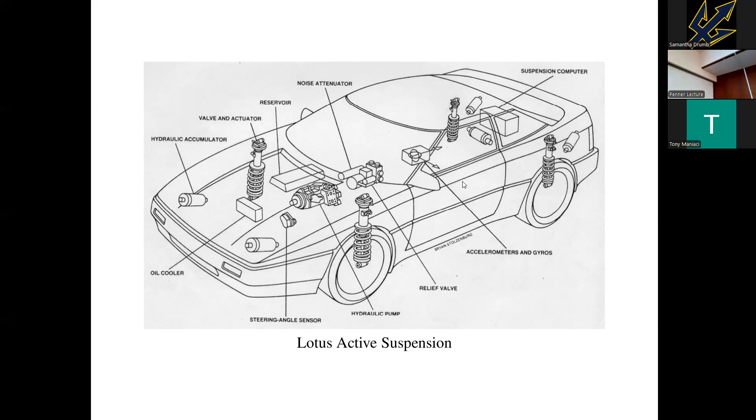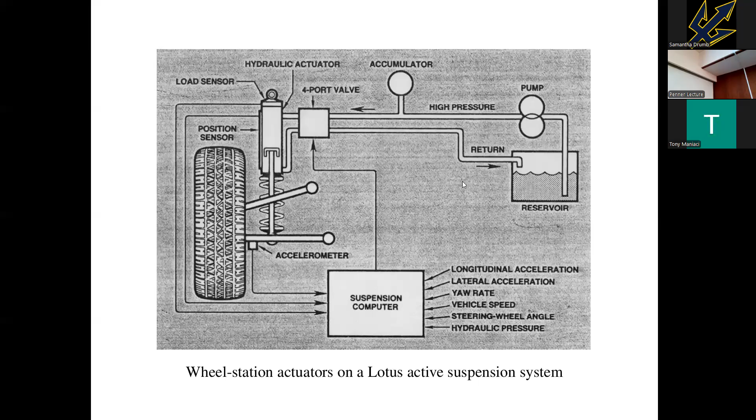We have a piston and cylinder, and high pressure hydraulic fluid can be injected above and below the piston to extend and contract it through this four-port valve. It's all controlled by the suspension computer, which takes measurements from a load cell, a position sensor, and many other sensors on the car. So this is a control system.

Fast forward five years, this is also a piece of motor racing history. It's the first time the championship was won with an actively suspended car. This is the Williams driven by Nigel Mansell. And this is the beginning of the story for me.

I arrived back in Cambridge. I'd spent three years teaching at Ohio State from 1987 to 1990, and I was appointed a lecturer in Cambridge immediately after that. The following summer, I arrived as probably the most theoretical person in the control group, with a background in robust control and so on.

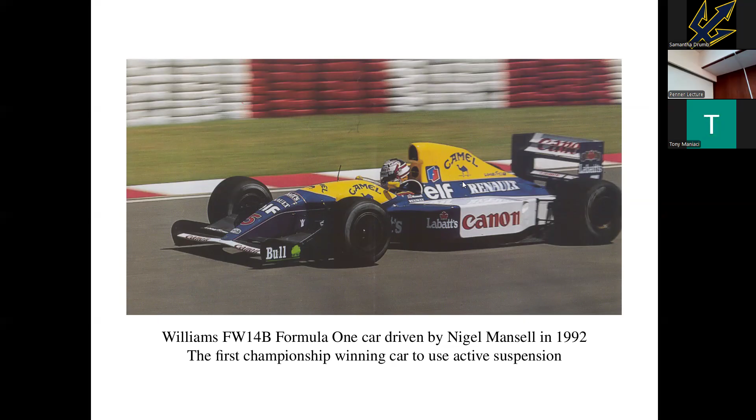Through a chance phone call in the summer of 1991 from Paddy Lowe, who later became quite famous as an engineering designer and director in F1, I got involved in consulting on this very project. It was tremendously exciting. I was brought in as a control specialist, not knowing really very much about mechanical control systems or the particular needs in Formula 1.

One of the main reasons and advantages of active suspension in F1 was due to the aerodynamics. The wings on a Formula 1 car produce downforce, so that you can go around the corner quicker by increasing the normal reaction. The downforce is about four times the weight of the car at high speed, so you could theoretically drive an F1 car on the ceiling.

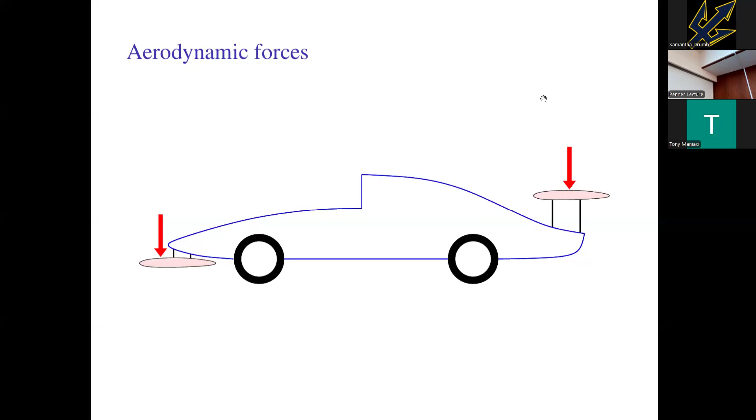Now the problem with a normal suspension system, and even the tires, is that as downforce increases, the ride height reduces. And the aerodynamicists don't like that — they want to design a lift coefficient so the car works at a particular ride height. Active suspension was very good because it could adjust for that, compensate, and be scheduled on the speed of the vehicle. So that's the first big advantage of active suspension for racing cars of this type.

There are also other important aspects: ride and handling. Ride is how well the car responds to bumps in the road, that's how I like to think about it. Handling is how well the car responds to driver inputs like braking and cornering.

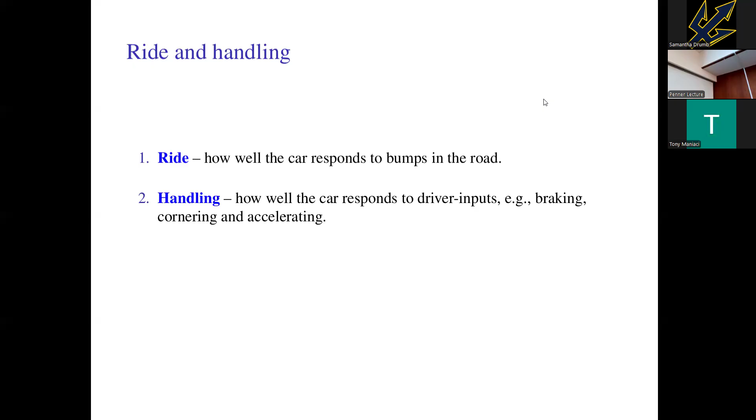And it's a compromise. Here's an illustration: we've got the Cadillac Fleetwood sedan, and this gives a wonderful ride. You're going along a bumpy road and you get a smooth ride, but coming to the stoplights or taking a corner, the body rolls around and it's uncomfortable for the passengers.

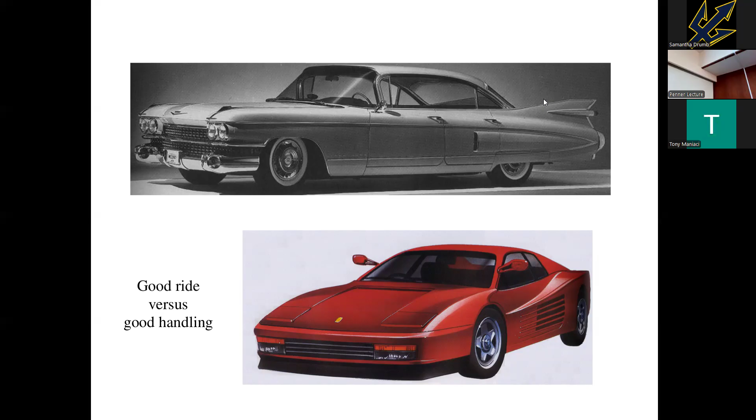The Ferrari Testarossa has great handling, so the body is well controlled under braking and cornering, but it's not very good on a rough road. So for the Ferrari you need a smooth road, and for the Cadillac you need a smooth driver.

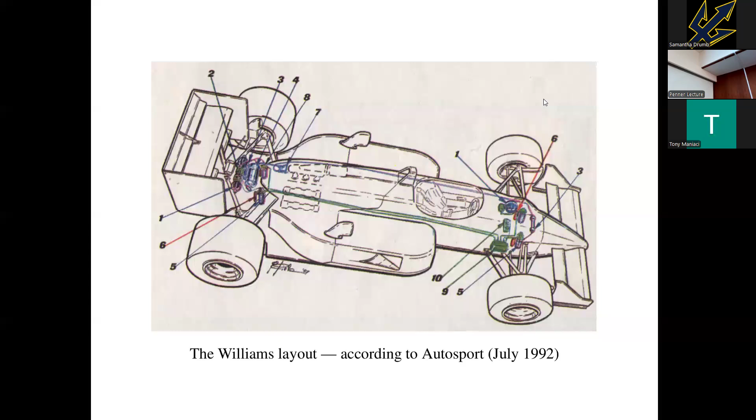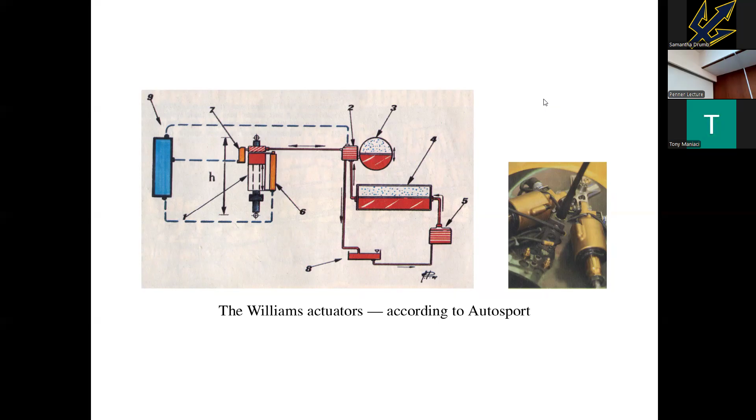The Williams hardware layout was quite different from the Lotus — you can see hydraulic links from front to rear of the car, for example, and the wheel station actuators were single acting rather than double acting. There are a number of significant differences in how they operated. So this started to interest me.

Active suspension is a great multivariable feedback control design problem. One brings the techniques one knows, but there are all sorts of extra things to learn and puzzling things for the theories: different hardware layouts, hydraulics, passive elements, sometimes different actuators and sensors. How do you come to terms with this? We know how to derive control as control theorists once someone gives us the plant, but the plant itself — there are all kinds of possibilities there to think about.

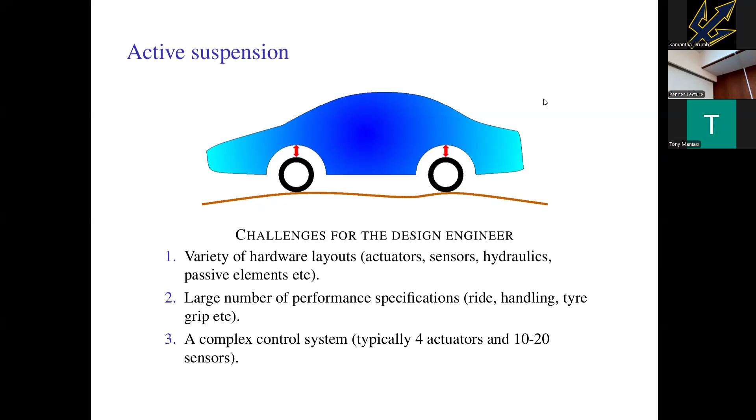And then there are all these different performance specifications — ride, handling, tire grip, and so on. It's not a trivial control system, with actuators and between 10 and 20 sensors.

So the consulting and applied work was very exciting, but I started to think theoretically, trying to understand the fundamental trade-offs going on here. This is commonly done in the area: boil things down to the simplest possible model, called the quarter-car vehicle model. It's two masses and a force, an equal and opposite force that can be applied between the masses.

If it was a conventional passive suspension, that would be a spring and damper. If it's an active suspension, you're providing the force somehow. So this is a useful abstraction.

We've got road disturbances - those are the obvious ones. And I found it useful to think about load disturbance as well, because in the F1 case, you've got downforce from the aerodynamics, so it's another pathway. At least at a certain level of simplification, you can think of load disturbances as a surrogate for the handling input - it's a different transmission path.

For example, when you brake, you get induced loads on the sprung mass. There's also induced loads on the unsprung mass, but as an approximation, in a simple model, Fs is a surrogate for handling.

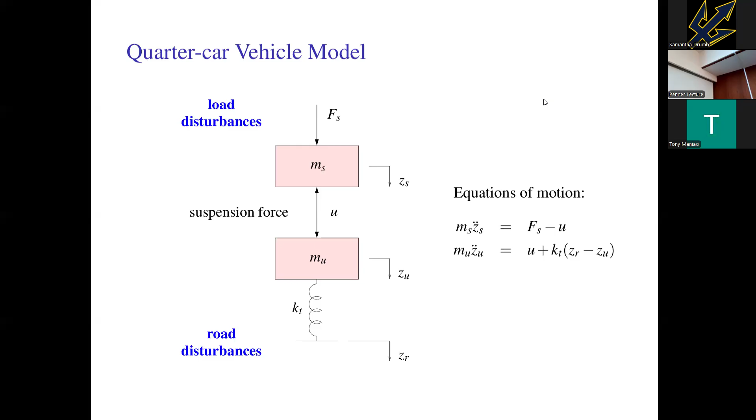The equations are two lots of Newton's second law, and what I'd highlight here: notice that the suspension force is minus u in the first equation and plus u in the second. It was Karl Hedrick, the late Karl Hedrick from Berkeley, who made a very interesting observation.

I bumped into this when I started working on this problem. If you take the sum of those two equations, u cancels out. So the control force doesn't have any effect on this particular equation, which you call the invariant equation.

And there are certain consequences. So if you look at road disturbances, for example, you can look at a transmission path to various things: sprung mass, or sprung mass acceleration. Ride comfort is what that transmission path is used to evaluate.

Tire deflection is sometimes thought of as a handling input, but it's also called mechanical grip - how well the car is staying in contact with the road. To prevent too large a deflection there when you're going over a bumpy road surface is important.

Suspension deflection, if you've got limited travel, you've got to worry about that. The important thing here is that these three transmission paths turn out to be dependent on each other. In other words, if you design one, the other two can be calculated from the invariant equation. So already that's an important insight for the designer, no matter what you do. If you design one pathway, the others are fixed.

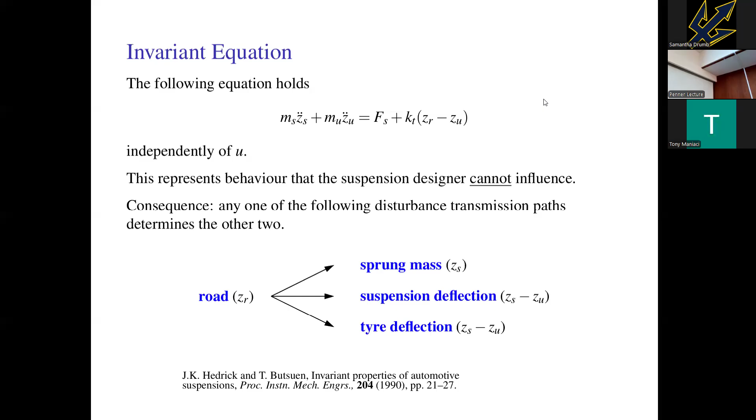So I started to work on this, looking at questions, as one does as a theorist. You take a problem like this and you try to develop insights. What is the complete freedom on a given transfer function? The methods of robust control that we were familiar with at the time allowed you to get nice, necessary and sufficient conditions on what was possible and what was not. And this is hardware independent.

So again, I found that very useful - that you could have a benchmark before you decide on the layouts of actuators and sensors and whether there are passive elements. You would know what was possible. And so you could even ask, what is the minimum number of sensors to achieve a certain effect?

Are there conservation laws? I'll show you one. And can the disturbance paths for ride and handling be adjusted independently? The invariant equation doesn't prevent ride and handling being independently adjusted, of course, and that's one of the big attractions of active suspension.

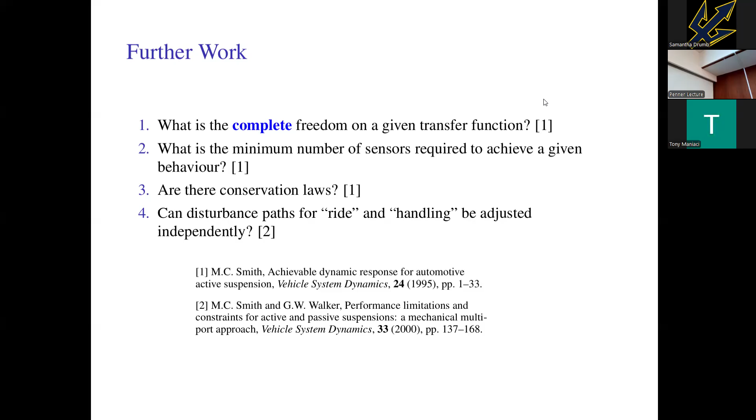You try to have a car that's like the Ferrari for handling, and like the Cadillac for ride. And that's the aim of such systems.

I'll just show you one conservation law, which is very familiar for people who've taken advanced classical control courses. So what we're looking at here is the grip transfer function - the transfer function from undulations of the road surface to deflections of the tire. What it's saying is the 0 dB line, that's modulus 1, no amplification.

The green is when the deflection of the tire is less than the excitation of the road at a particular frequency, and the red is where things are worse. The result - the area formula - says that those two areas are equal. So no matter how clever you are, active suspension, whatever, there are going to be frequency ranges where the mechanical grip is worse, where there's actually amplification. So you need to bear that in mind in the design.

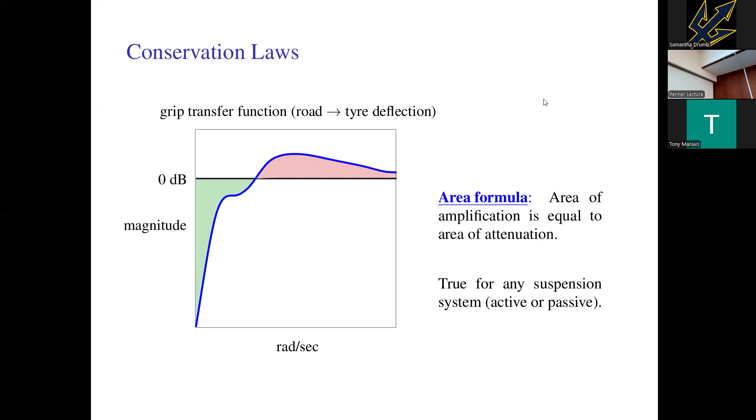Moving on just two years, Williams won the championship in '92 with Nigel Mansell, and with Prost in 1993.

Active suspension was banned for the '94 season. Why was that? Technologies come and go all the time in Formula One, and sometimes there's no logical reason why things are banned. Active suspension was not on the radar at all for being banned when people were not getting it to work. It's only when one team gets ahead and the races become boring because the same team's winning all the time, that the focus comes on the technology. And so it was banned in the '94 season.

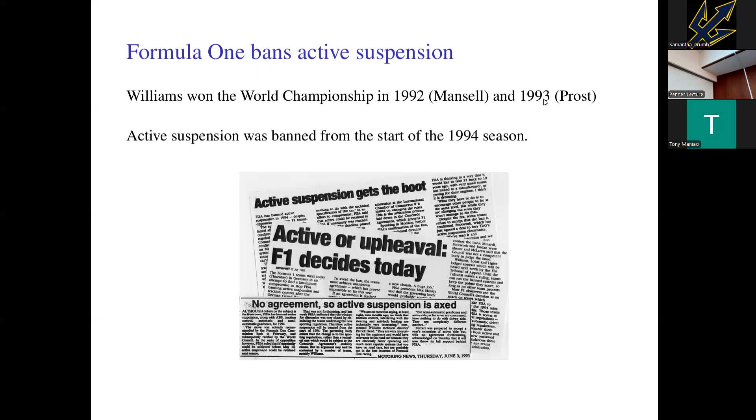There is something very sad that happened in the '94 season in the Williams car. Ayrton Senna was tragically killed at Imola. I give this quote here - I think it's the only time when active suspension was mentioned in a Times leader column.

Initially the cause of the crash was debated and was not properly known. People pointed the finger at the ban of active suspension and said, well, the cars are now more difficult to drive because the aerodynamics has been tuned. It's so sensitive. Now with a passive ride, they're much more twitchy. Is that the reason? It turned out not to be the reason, but it was a fracture in the steering column that was the cause.

But I just mentioned that, and I think now I'd like to move from that very sad event to come back to how I responded to this as a theorist. It's very wonderful to be working on these systems and doing theory at the same time, and suddenly we weren't allowed to race them anymore.

So let's go back to the quarter car and compare. On the left, that's a conventional spring and damper suspension. On the right, we have an actuator and a controller, and we're making measurements on the system. The work I'd started to do in active suspension was very much focused on what are the limits, what's achievable, what's the maximum you can achieve with an ideal actuation system and a sensible set of sensors.

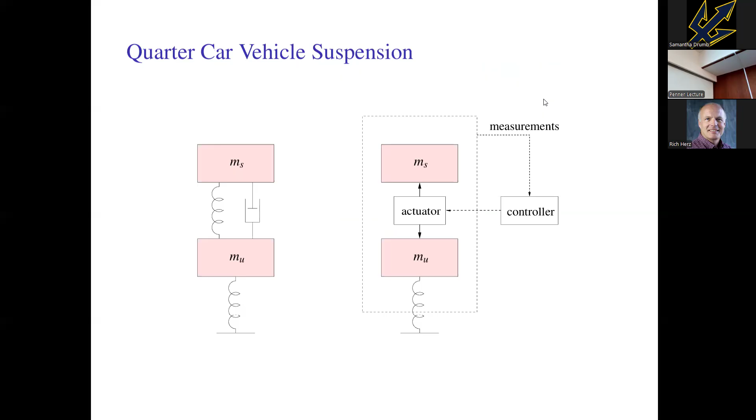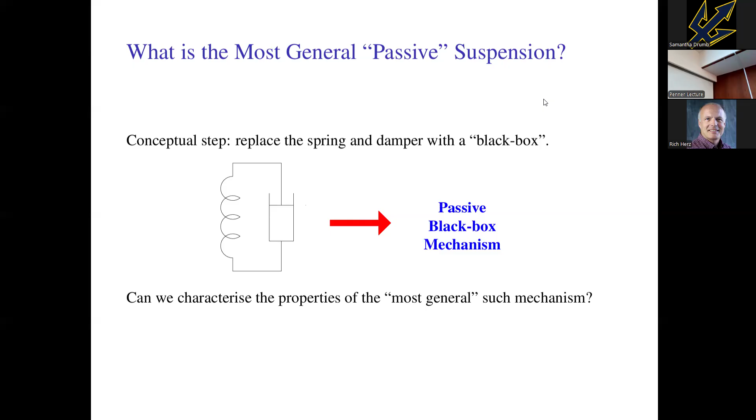Okay, so I thought this would be a quick and easy theory paper. I knew some theory from my PhD time about passive impedances, electrical impedances. And so I thought that, well, conceptually, you can replace the spring and damper by a general passive black box mechanism. And if you don't have a power source, it is not active - that would be the most you can do. And then the natural thing is to try to optimize over that class. So can we characterize the properties of such a mechanism?

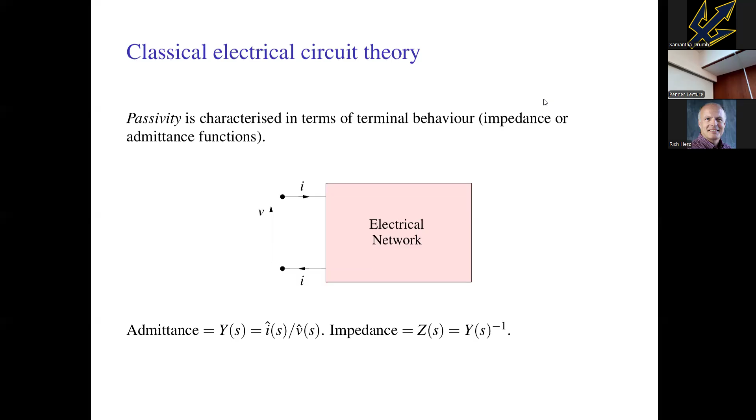Okay, so let's think about the electrical case. So we're thinking in black box terms, an electrical network, two wires coming out, a current I being drawn, and a voltage across the terminals. The admittance is current over voltage at the driving point, the Laplace transforms of those, and the impedance is the inverse of that.

Now, what was shown back in the 1930s is that a necessary condition for an impedance to be passive is that it must be positive real. So if you draw the frequency response of such a linear time invariant impedance function, it must always lie in the right half plane, can't enter that red forbidden region. And that it's necessary is not too difficult to prove, because the power drawn is the product of current and voltage.

What we're saying here is the phase shift is between minus 90 degrees and plus 90 degrees. So if you take current times voltage, by Parseval's theorem, you get two sinusoids. They can be shifted by a maximum of 90 degrees. If you use simple trig formulae and integrate over a whole cycle, you find that you get a positive number when the phase shift between those two sinusoids is less than or equal to 90 degrees. If it's more, then it becomes negative, and you can have a continuous cycle and pull power out on a continuous basis.

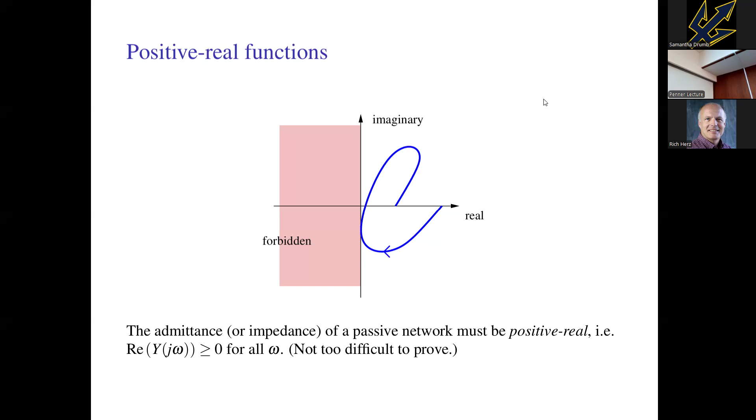Now, the really clever part is that the converse is true: if you take any rational function that's positive real, that has an impedance function as I've just described, then there's a circuit realization to implement that function. And that was first shown by Brune in the 1930s, as a student at MIT, or a postdoc, early career.

But he needed resistors, capacitors, inductors, and transformers. In 1949, there was a beautiful construction by Bott-Duffin, which showed that RLCs are enough—the three basic two-terminal elements, resistors, capacitors, and inductors. There is a circuit arrangement to realize any rational positive real function. Okay, so that's the theory I knew as a PhD student.

And I thought, okay, well, what we do with a Formula One car, we optimize now over positive reals instead of the spring and damper. Okay, so the next stage is, well, how do you build? We know there's an electrical circuit. How do you build a mechanical one?

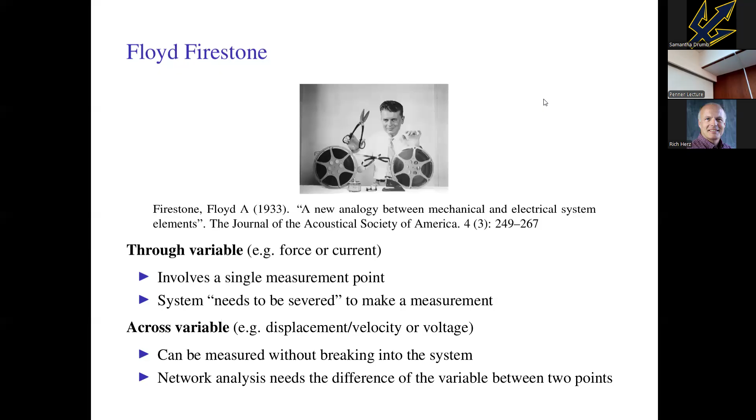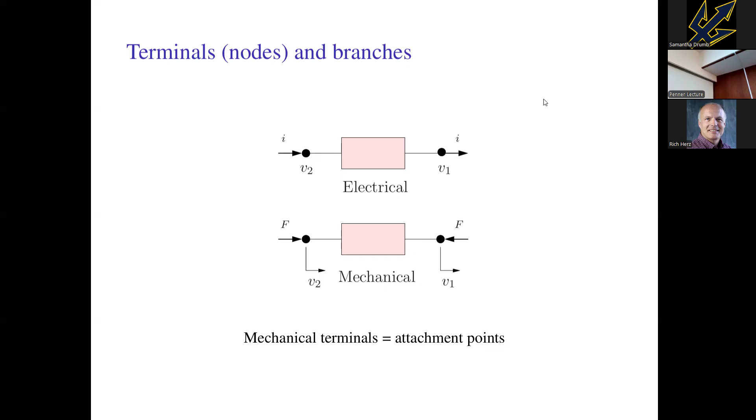So it's nearly 100 years since the force-current analogy was proposed, but people's notes are still very slow to be updated. You find that the majority of courses around the world on system analogies still follow James Clerk Maxwell's force-voltage analogy. So the best book on the force-current analogy is this one, Shearer, Murphy, Richardson, from 1967.

MIT really had a good go at changing to the force-current analogy in their teaching. I haven't checked whether they're still persisting with it. Cambridge had a go in the 70s, and somehow when the lecturers changed, it got abandoned—it went back to the old system. We're having another go. But most courses still use the old force-voltage analogy, which I think is a pity.

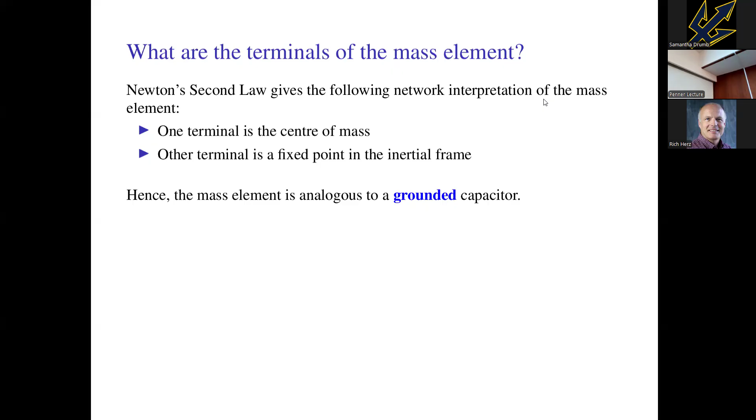Another thing about Firestone, what about the mass element? Let's think about that from a terminal point of view. So Newton's second law - we're looking at the motion, the acceleration of the center of mass relative to a fixed point in the inertial frame.

Firestone said the mass is analogous to a grounded capacitor, and he proposed this symbol. It looks a little bit like a slide or something moving in and out. But for a point mass, there aren't two terminals that are freely movable in space - there's just one terminal.

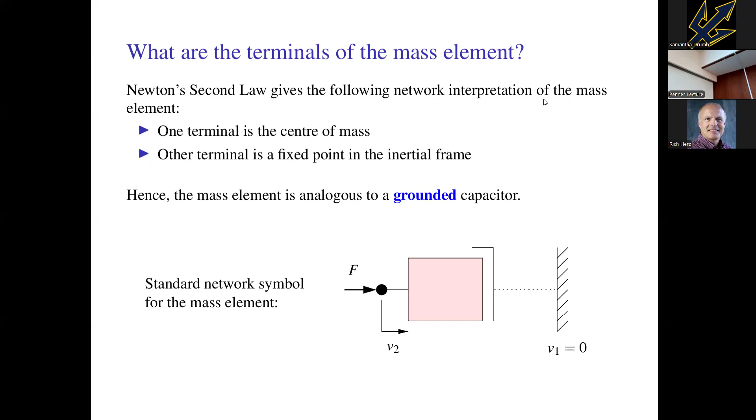So in Shearer, Murphy, Richardson, and in Firestone, you find this mapping: the spring maps onto the inductor. It's not the one we taught in school very often, it's the other way around. But this is the force-current analogy.

Damper and resistor, of course, those map over in either analogy. And then we've got the mass analogous to a capacitor, but it's highlighted there in red because it's only got one freely movable terminal.

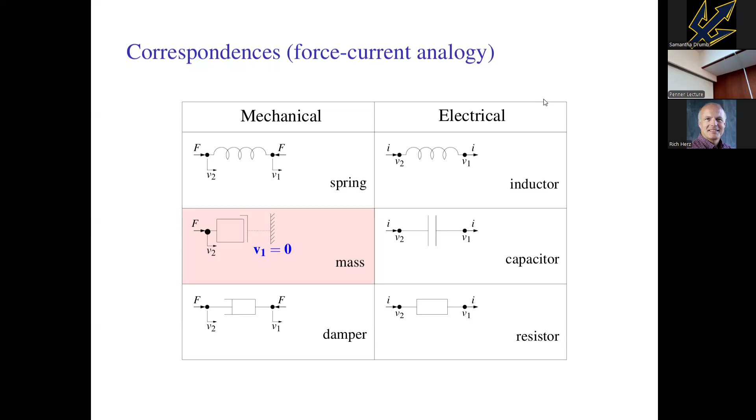At this point, there's nothing new here, nothing I'm describing that wasn't well known. But at this point I'm a little annoyed, because there's a snag here that's holding up the theory paper, and what to do about this?

The synthesis theory doesn't work with the mass element. First of all, if you've got an electrical circuit with ungrounded capacitors, you won't have a direct mechanical analog, and you can very easily find circuits within the class where you need ungrounded capacitors, so you've got a problem there. And the mass element also - if you have a 3-ton mass that you needed inside your circuit, that wouldn't be very good in the suspension system.

So the black box impedance you want to connect between the unsprung mass and the sprung mass should have small mass. So that's the second disadvantage.

So floating around in my mind was this question: is it possible to construct a physical device so that the relative acceleration between its endpoints is proportional to the applied force? We're looking for a device with two terminals, which are freely movable in space, and which will have the property that the equal and opposite force at the terminals is proportional to the relative acceleration between them.

I wasn't thinking that the answer would be in the positive. I was thinking of ways to prove that well, what we all read in the books is the way it must be, and that you're stuck with a spring and damper. Okay.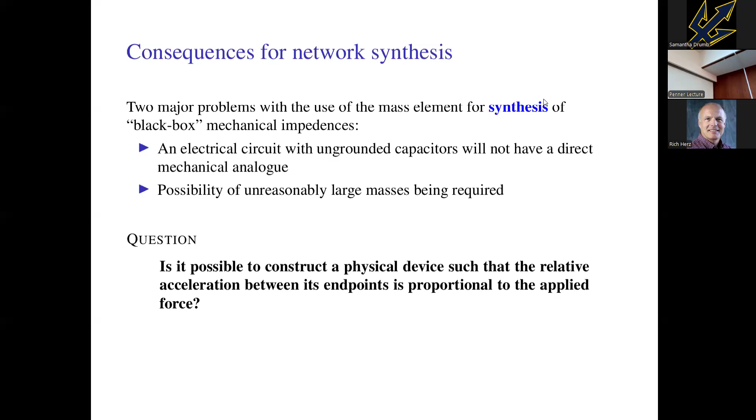It shows that you sometimes should think positively, and thinking positively led quickly to this idea that if you take a housing and a plunger sliding in and out, and a rack and pinion, and a system of gears attached to a flywheel - if you move this in and out, actually that is a good approximation to what we're looking for: something where force is proportional to relative acceleration.

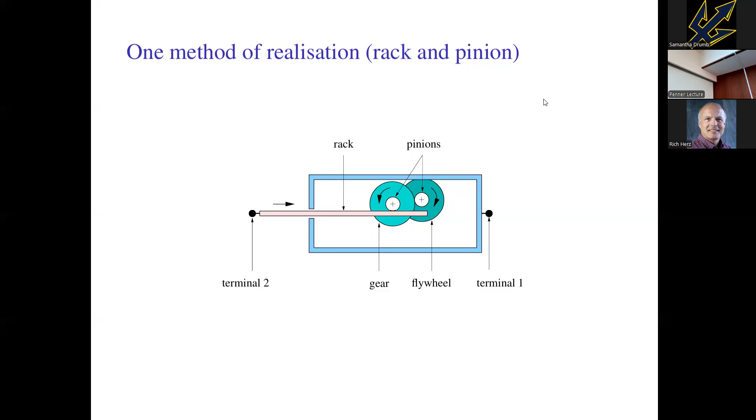So that was my first thought, and I thought one should be careful about inventing new words, but after some reflection, I thought it was justified to highlight the concept, to invent something. So this is the word I chose: inerter.

And the ideal inerter is an ideal modeling element. All the others - we have ideal modeling elements which have the mathematically perfect linear law, and that's different than the physical realization, which only approximates the law.

So here's the ideal inerter. It's a mechanical one-port device such that the equal and opposite force between the nodes is proportional to the relative acceleration between them. So it looks a bit like Newton's second law. Force is a constant, which I think it's natural to call inertance, times v2 dot minus v1 dot - that's the relative acceleration between them.

Its units are kilograms, and the construction I just showed would allow you to have a large number of kilograms for a device of small mass, which is a key thing. And the stored energy is a familiar formula: half b times the relative velocity squared.

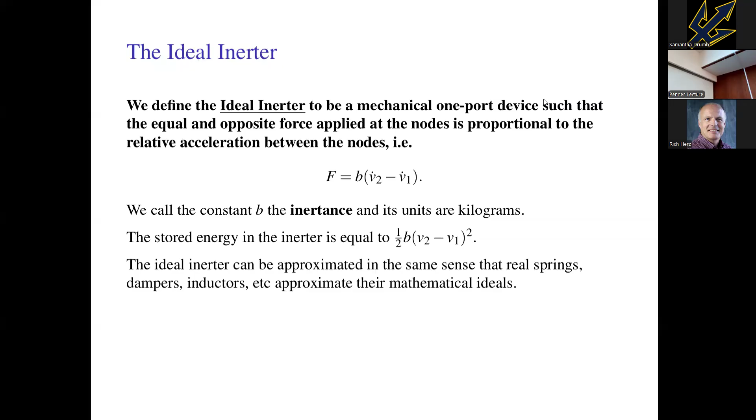And I think that construction shows that it can be approximated. The ideal inerter can be approximated in the same way that real springs, dampers, and inductors can be approximated, and we can assume its mass is small.

So you can think of other ways of realizing them. You can have a rod with a screw thread and, for example, a ball screw and a nut, which spins the flywheel actually about the rod.

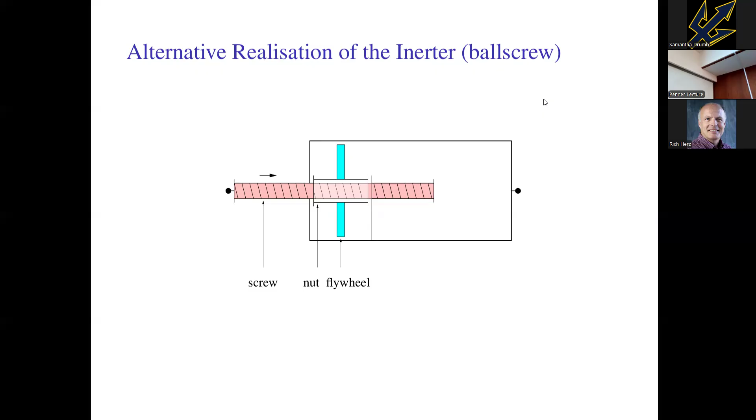So here's the first one we made in 2003 in the engineering department at Cambridge, with a mass of about 1 kilogram, and the inertance is about 150 kilograms. And if I slowly dismantle it, remove the housing, you can see the screw thread, you can see the flywheel there.

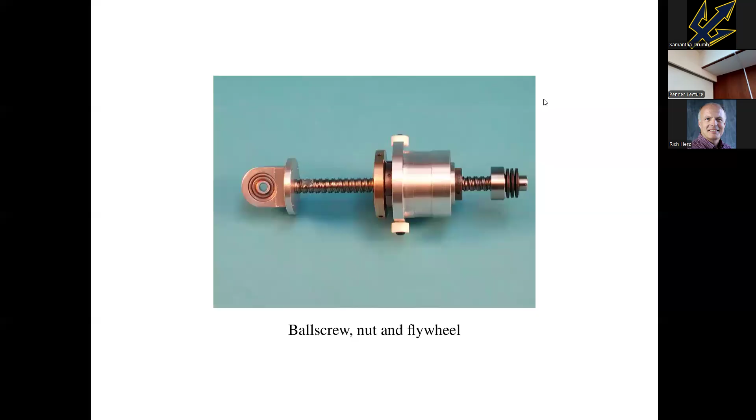Now the flywheel is removed, but you can imagine holding the end piece in your right hand and the housing with the white pegs in your left hand, moving this in and out. Then the nut in the center spins in proportion to the position.

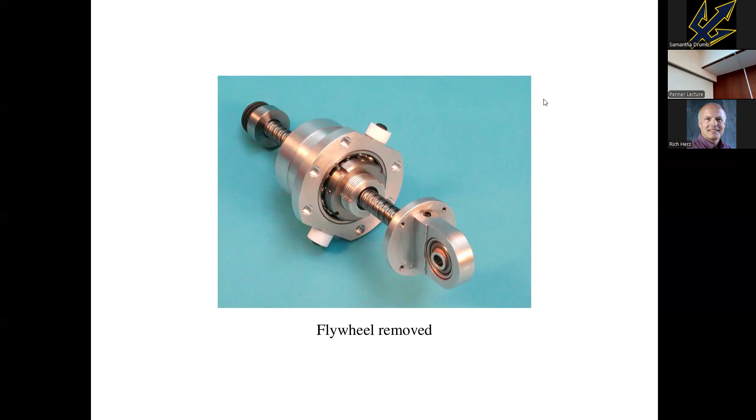That's a close-up of the thrust bearing. British Airways were kind enough to allow me to bring one in my baggage, so here, this is the one. It's been passed around in lectures many times, so it seems to be surviving. I'll pass it round now. The thing to do is try to get it to the middle of its travel, and then move it just a little bit in and out in a sinusoidal motion.

Remember, the inerter is 180 degrees out of phase with the spring. So when you get to the maximum extension, the force is pulling rather than pushing. The spring will push you back. The inerter pulls you in the opposite direction.

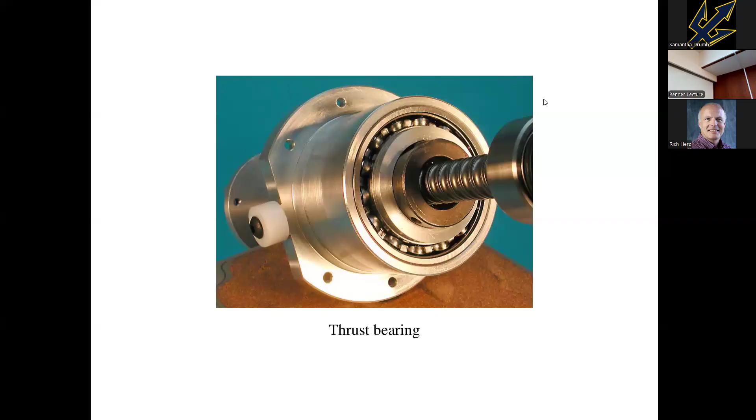So the synthesis then, that's the element I like to draw for the inerter, representing the flywheel capacitor with the ends filled in. And that's for network synthesis. The mass doesn't go away. The mass is fundamental, you still have the mass everywhere. But for constructing positive real passive impedances, then we can use this for synthesis.

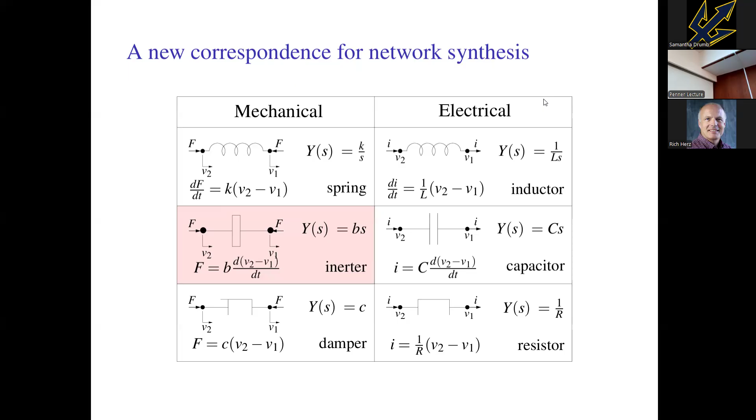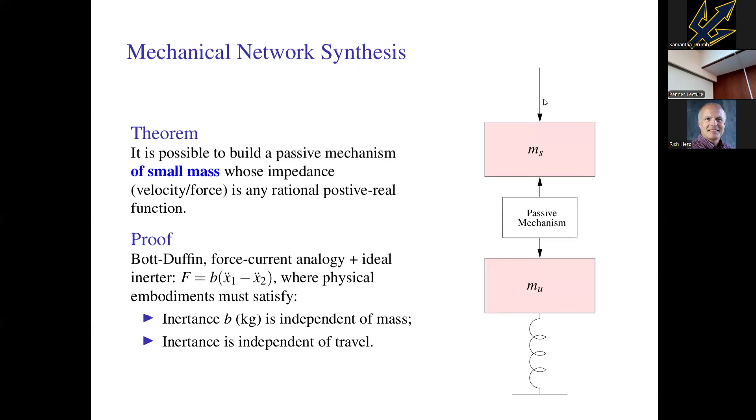Just to finish the point, I like to write down as a theorem: it's possible to build a passive mechanism of small mass whose impedance velocity-force relationship is any positive real function. We're using the Bott-Duffin theorem, the force current analogy, and the ideal inerter to establish that result.

Just to run things home, I'll be an evangelist for the force current analogy. I'd like to show you on the board the electrical analog of the quarter car. So I'm going to have electrical ground here, and the unsprung mass mu, that's a capacitor which is grounded. Then the sprung mass is another capacitor which is grounded, and the suspension system, well, it's a spring and damper, so resistor and inductor. This is Y of s. That connects between those two terminals.

The tire now, well, the constant becomes inverse, KT inverse. Now this here is ZR. So what about the road? Well, actually you can think here, ZR dot of a velocity source, that's a road excitation, and on this side, so that's a voltage source from the velocity source, and we here have Fs, which is a current source. Okay, so that's the circuit, I'll bring it up here as well.

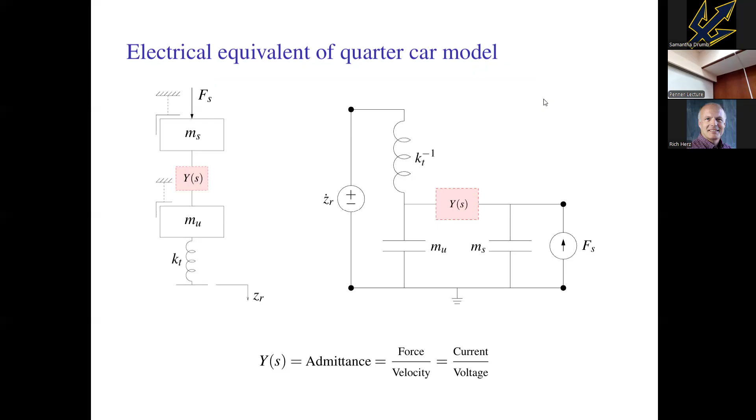So at this point, the calculations showed that adding the inerter to the suspension, you could achieve improvements that you couldn't get with a spring and damper. So here on the left, the red curve is the best you can do. They're very stiffly sprung, so that they oscillate a lot, and this is the least damping you can get with springs and dampers only. The dashed curve, you can achieve that with the inerter. So surprisingly, the inerter is an energy storage element, not a dissipator, but it allows you to reduce oscillation in combination with the dampers. And you can see the impedance function, the phase goes positive, so you're getting phase advance, which you can only achieve with inerters in the suspension.

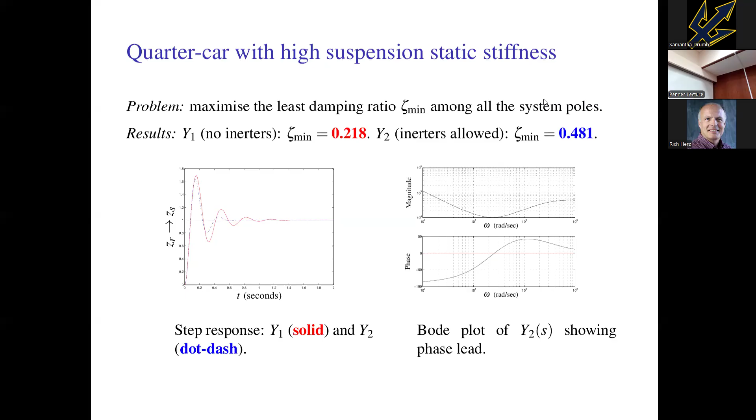At this point, Adrian Newey and Paddy Lowe had moved to McLaren, and so it was natural for me to approach McLaren with the idea. They signed an agreement with the university and developed it, and this was the first race with Raikkonen. He got McLaren's first victory of the year with the inerter.

We had a very strict confidentiality agreement, and so for two years, people were asking me at Cambridge, 'How are you getting on with that inerter stuff? Weren't McLaren interested?' Meanwhile, they were really winning races, but I couldn't tell anyone. McLaren invented their own name for the inerter, the J damper, and the idea was to prevent links to other teams, so if people left to go to other teams, they wouldn't connect it with the technical literature.

The J-damper came into the public domain in 2007 because of something called the Espionage controversy. McLaren employee Mike Coughlan had a buddy at Ferrari, Nigel Stepney, who gave Coughlan a floppy disk with all the current Ferrari drawings. Coughlan's wife went down to a Xeroxing shop in Woking and printed out 700 pages of Ferrari top secret drawings, and it just happened that the lady in the shop was a Ferrari supporter. So McLaren got into a bit of trouble for this, even though it wasn't clear the drawings had much effect, if any, on their program. They were taken to the FIA, there was a World Council hearing, McLaren were found guilty, and given the largest fine in motor racing history - it's still the largest fine in sporting history. They were fined $100 million.

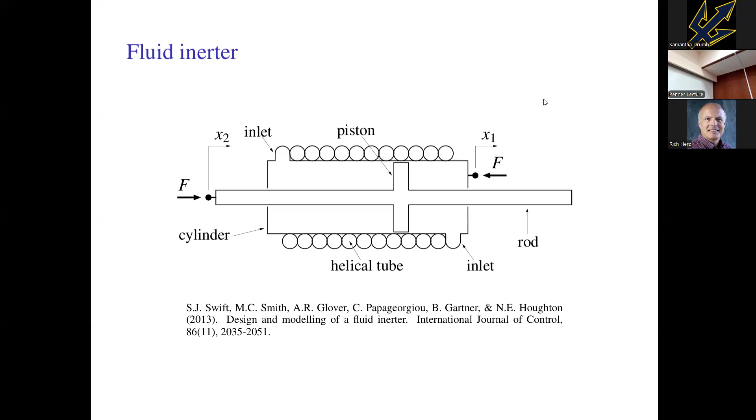You can also make inerters with fluids. Here's one idea: having a helical channel, and as you move you've got a double-acting piston pushing fluid through a long channel. The ratio of areas between the piston and the helix is the gearing ratio, and the mass of fluid in the helical channel is the mass - so it's trying to act like an inerter if you have enough mass in there. Of course you've got viscosity, so you'll have damping effects. We've studied this, and you get interesting non-linear damping characteristics with such devices, in addition to the inertance effect.

To finish off, I think I just want to give you a snapshot of some research spin-offs of the inerter idea.

Circuit synthesis was a very active field until about the late 1950s. Then active circuits came along, and people left the field. But there are certain questions. For example, the Bott-Duffin construction is possibly quite wasteful in terms of number of elements. So we had a look at what were the most efficient realizations, and that's relevant in the mechanical domain.

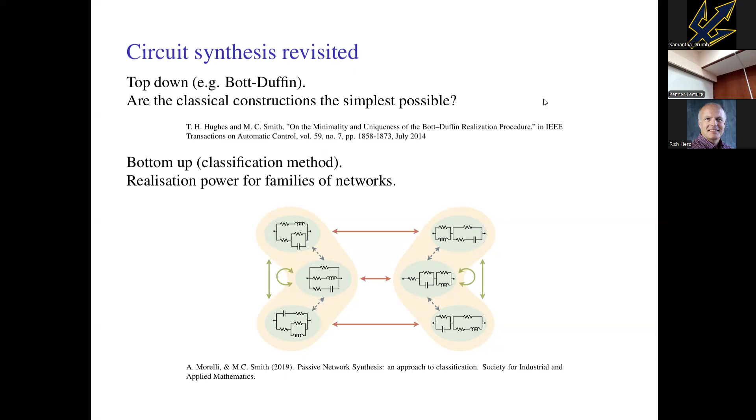I call that the top-down approach. You start with a positive real function, and you find the best realization of it. The bottom-up method, the classification method, asks you to study families of networks and look at their realization power. So you carefully understand simple networks and what are the best combinations.

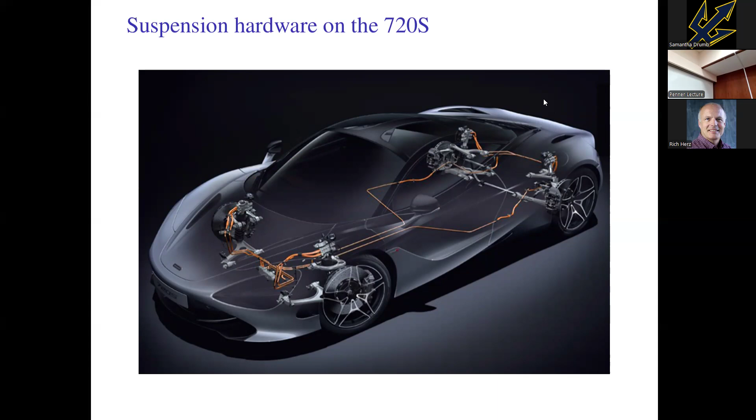So another interesting direction I was involved in was a collaboration with McLaren Automotive, for this particular car, the McLaren 720S. This is a semi-active system. We had a project with them together with Will Holt and Panos Brezas. When we came into the project, the hardware was already determined. There's interconnected hydraulics, but there are adjustable dampers. I think this picture is the best view.

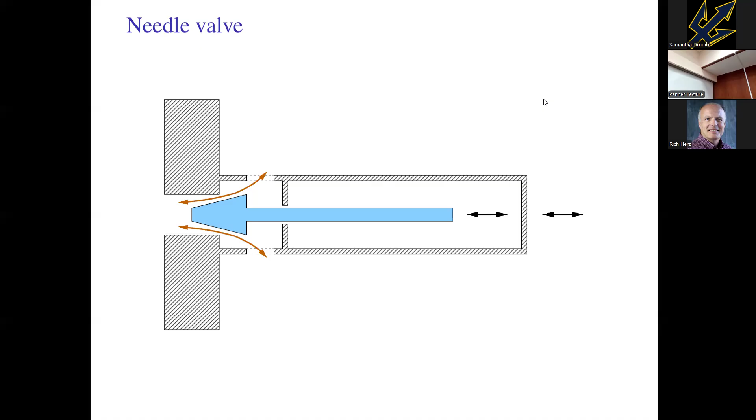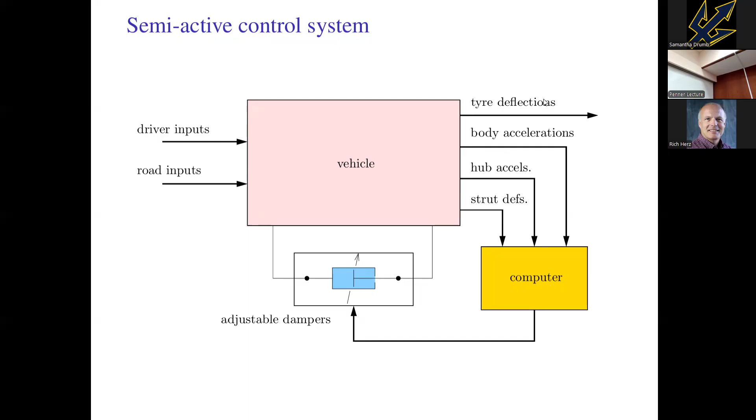So it's a regular damper with an orifice, but you have a needle valve which adjusts the size of the orifice, and you have a solenoid that can jiggle the needle valve at a high rate, so you can adjust the damping rate. And so we did. It's a non-linear problem, but then you've got to figure out road inputs and driver inputs, how best to design this feedback. That's one thing that would be another story to explain, that system.

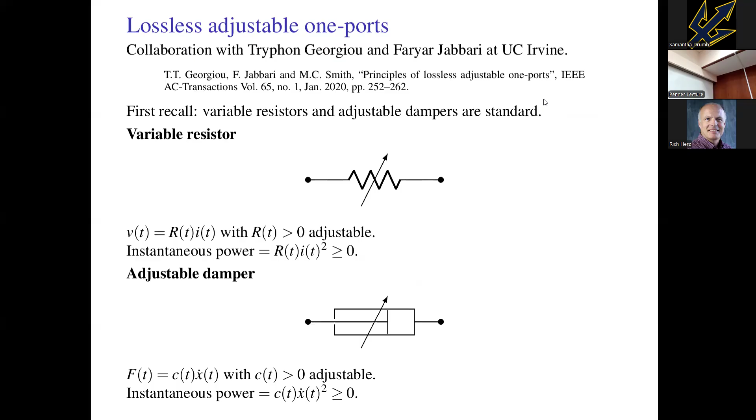I'd just like to talk about a follow-on that we did with colleagues at UC Irvine, Tryphon Georgiou and Faryar Jabbari. Variable resistors are standard: V of T is R of T times I of T. Adjustable dampers are exactly analogous. And so the question is, what about variable stiffness springs?

People talk about variable stiffness actuators, but you can quickly show, I'll just flash the calculation up, that F of T is K of T times X of T, and you're allowed to adjust K. You can show that's actually an active device. It has to be active because you can cycle it, find a trajectory getting back to where you started, where the net energy over that cycle is positive. So you can pull power out.

So the question is, can you make a losslessly adjustable spring? In other words, could you have a little dial on the spring to adjust the stiffness in a lossless way? Well, we've puzzled about this for a long time, and in fact we have a construction. I won't have time to show you today, but the law is very interesting.

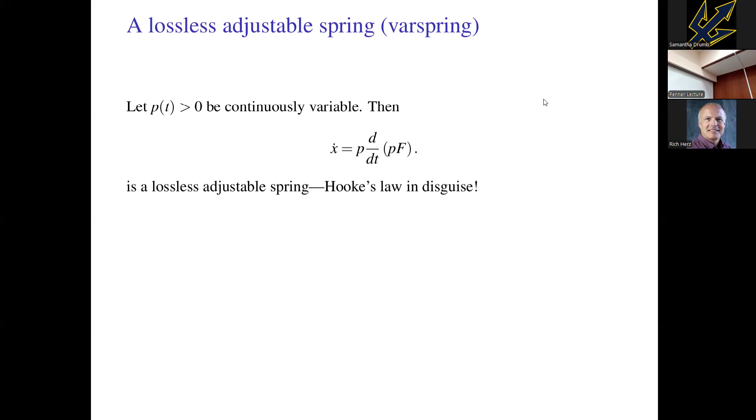Here's a spring. It doesn't look like a law for a spring, but you've got x dot, velocity, is p, which is something variable, times d by dt of p f. So you've got p inside and out. Now, if p was constant, it would pull out of the d by dt, and you'd have p squared. You'd have x dot is p squared f dot. So displacement is proportional to force. So that would be a spring. It turns out that is Hooke's law in disguise.

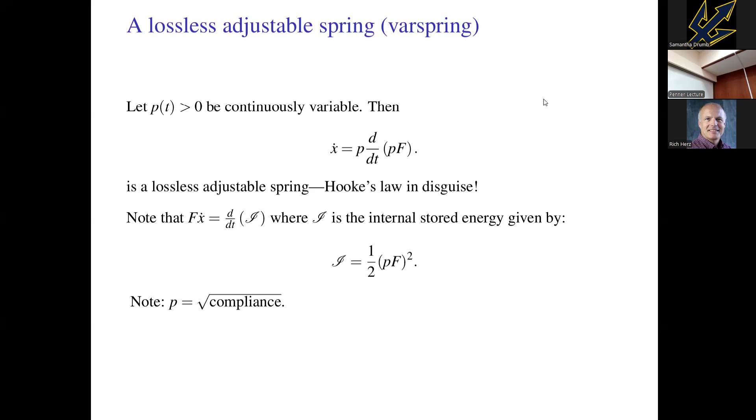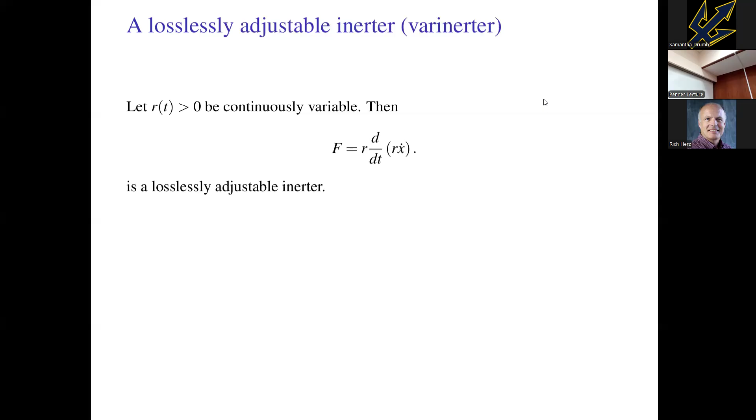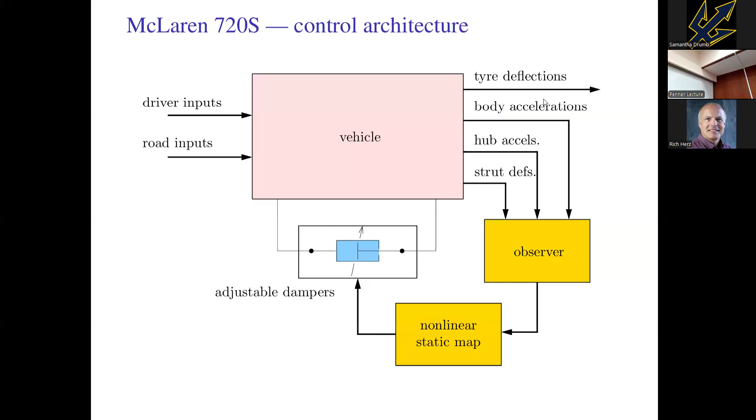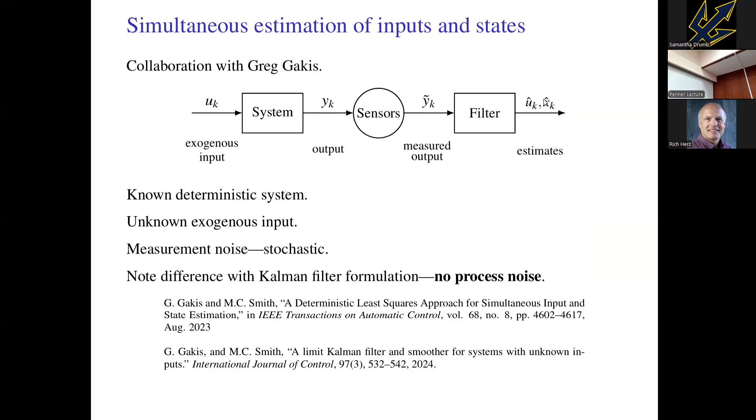So we've started on a direction for estimation, which is a generalization of Kalman filtering, where you throw the process noise away. You have the measurement noise, but no process noise, and you estimate the state and the input on an equal footing. This is joint work with Greg Gakis. I just flashed this up to say you can get Kalman filter recursions. It's a generalization of the Kalman filter, but it has state update, input update, and propagation. I'm not going to go through that.

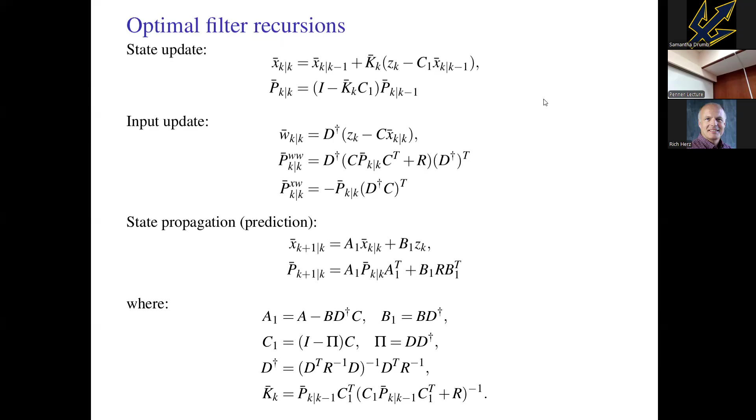Final slide: there's an interesting application of this. If you go back to the quarter car, you can think about how to measure the road profile. That's an exogenous input, which you could say is completely unknown. You can instrument the car with accelerometers on the two masses, strut deflection, and GPS, and it's an inversion problem. You can find with this filter the road profile without profilometers.

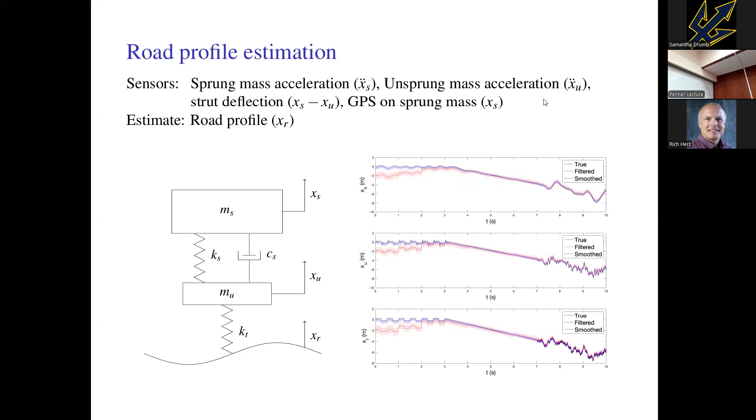I have perhaps run over time slightly. There's a lot of people along the way that I have to thank who participated in this work. And once again, it's a great honor to give this Penner lecture.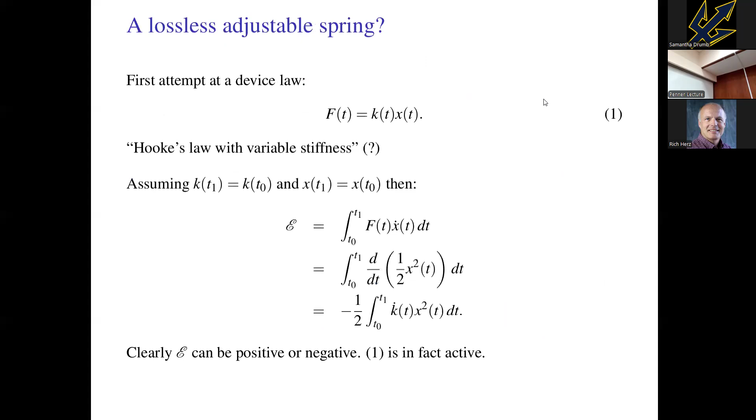There's also an advantage here. With the conventional vibration absorber, you're adding mass to the structure, and one limiting factor is how much mass you're prepared to add on. You might want to double it, but that's not practical, it's increasing the overall mass. Whereas there's no limitation here with the inerter. You can have 1,000 kilograms, 10,000, 100,000 in a device which weighs nothing.

I do have a question. I remember when you gave me a tour of certain parts of Cambridge that are registered, your favorite Cambridge guy is not Maxwell but Routh. So here you're now even choosing an American over Maxwell. But now here's a question, a serious question related to that.